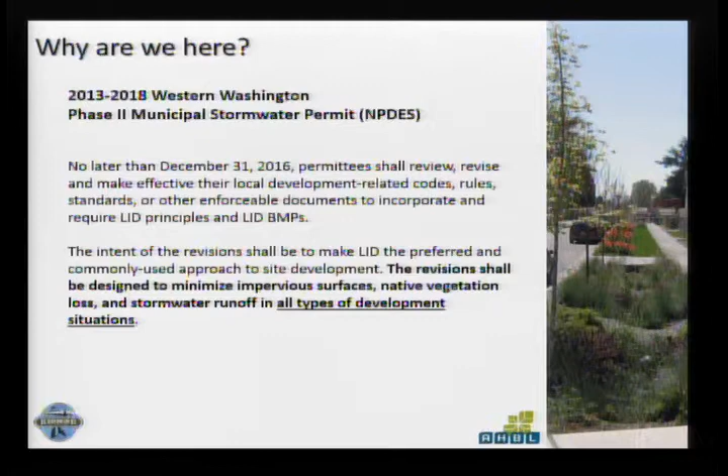Thanks, Richard. Again, my name is Wayne Carlson, and I'm not going to bore you with a lot of details you've already heard before, but I wanted to describe LID within the context of the permit - not necessarily the science per se, which I know you've been introduced to. You have plenty of low-impact development practices and principles right here on City Hall property. But I wanted to let you know what the permit is saying.

The permit says that low-impact development is a stormwater and land use management strategy that seeks to mimic pre-disturbance hydrologic processes of infiltration, filtration, storage, evaporation, through small-scale distributed facilities. The underlining in this definition relates to the fact that it purposefully says it's a stormwater and land use management strategy. That means the design of bioretention facilities, or the design of permeable paving - those are your stormwater facilities, or as Richard indicated, stormwater BMPs.

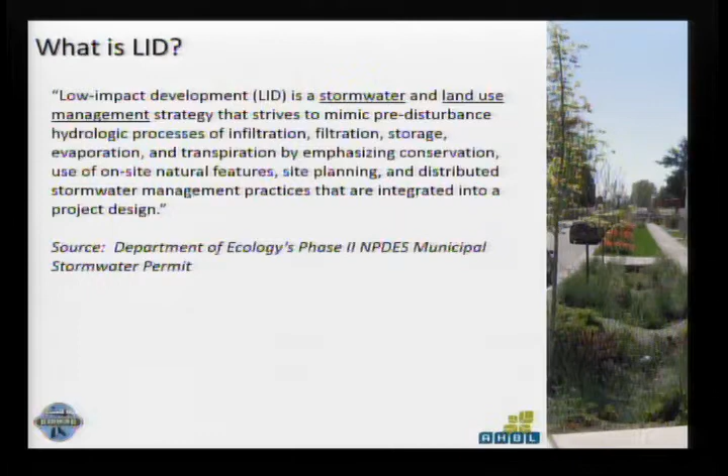So the key LID principles include reducing impervious surface coverage, reducing native or adapted vegetation loss, and reducing stormwater runoff. The key LID BMPs include dispersion or infiltration of stormwater, bioretention, and permeable paving. The permit also addresses some optional BMPs too, that permittees - and that's what you're known as, the City of Kenmore, in the vernacular of the permit, is a permittee - can also address, and those are rainwater harvesting, pin foundations, and vegetative roofs.

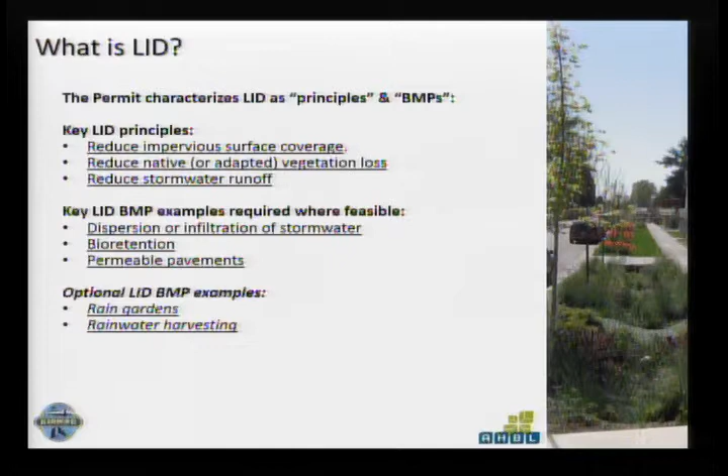So what we're trying to do is mimic a pre-development hydrologic process where, depending on the soils, you have some infiltration, but certainly a lot less surface water runoff, a lot less surface flow.

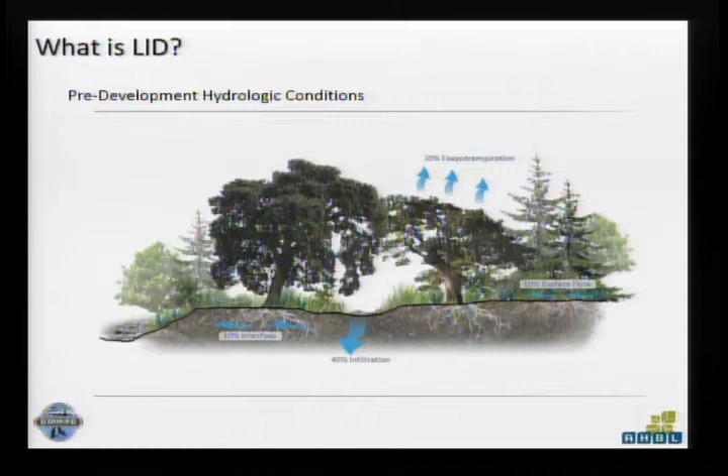So obviously in this developed condition, you still do get some evaporation off, say, a rooftop, but you have a lot more pollution-generating impervious surfaces, and the accompanying contaminants that run off of those surfaces. So obviously stormwater management is much more important in this developed condition.

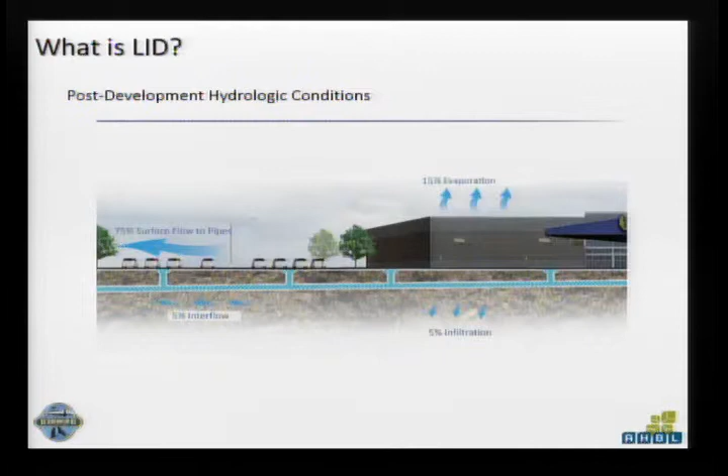So some of the real benefits, and I'll go through these quickly so we can get more to the permit: LID can reduce volumes, thereby minimizing high flows. Bioretention, for instance, is a type of enhanced treatment in the Surface Water Management Manual. It can replenish streams and wetlands, and reduce the size of conventional facilities. So often what you'll see is a combination of both — some LID used to reduce the size of a pond or a vault. It can increase open space, be visually attractive, and result in construction and maintenance cost savings.

And that kind of depends on the site itself, and then it can increase densities if an area that was previously designated for a pond or a vault now can be developed.

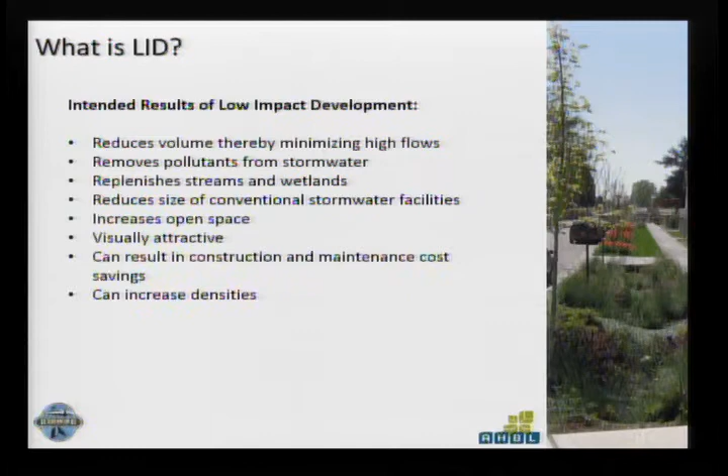One of the things you can also do is use landscaping passive open space that might be required through a subdivision, or even clustering, for surface water management and stormwater management.

The plat to the left is more of a conventional site, and what you don't really see, because it trails off the slide, is that about an acre and a half, almost two acres of property was required for an offsite pond on that left-hand side. So it was actually much more expensive to construct the one on the left than the right. The right manages stormwater mostly through natural features. There is a small pond, but it's significantly reduced in size.

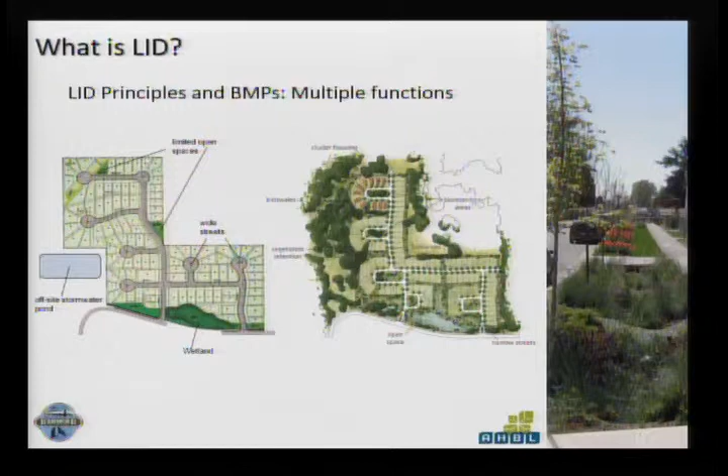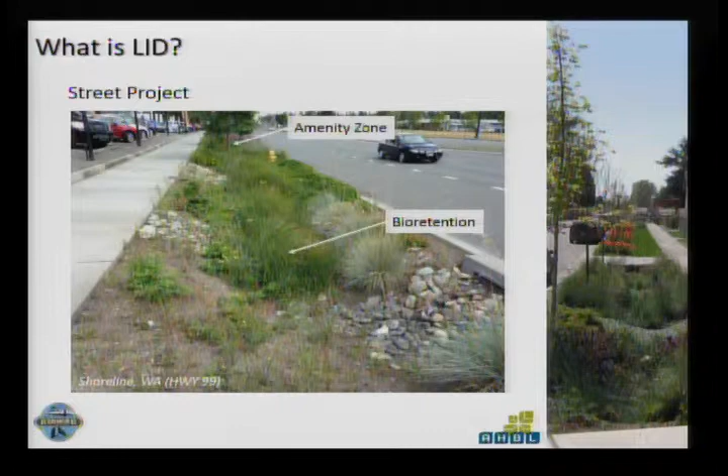Another big question was who's going to maintain these facilities. Facilities, whether traditional or low-impact development, if they're serving non-residential, commercial, or industrial properties, maintenance is the responsibility of the property owner or facility operator. But as these facilities are built as part of a larger surface water plan, they give the city drainage covenants or easements so we can inspect and make sure they continue operating as designed, since these folks get credit for having and maintaining them as part of the overall surface water management plan. Again, facilities in the public right-of-way, tracts, or easements are inspected and maintained by city personnel. The rain garden example on the single-family residence had a drainage covenant provided to the city—that photo was actually snapped by our inspector during one of his inspections.

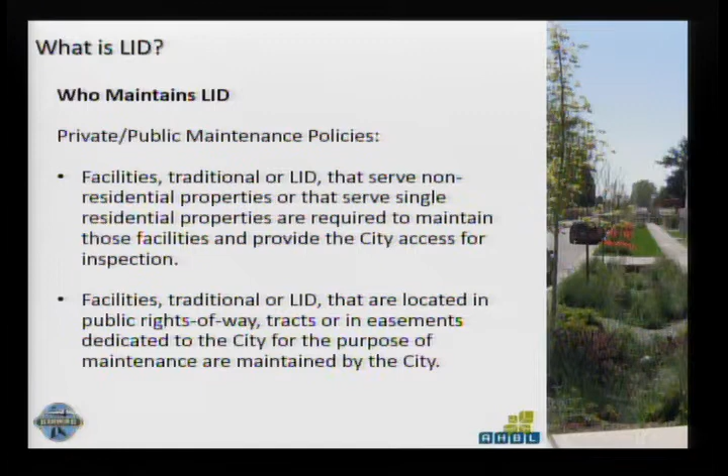Now we want to talk about the integration of LID principles and BMPs into the city's codes and enforceable standards. As Richard indicated earlier, a condition within the NPDES permit, S5C4F1, requires the city do this before December 31st of this year. The high-level elements are that low impact development is required unless infeasible, for all sizes of new and redevelopment projects—really, all sizes of 2,000 square feet of new plus replaced impervious surface, so the threshold is pretty low. The city must review and amend local codes and standards to integrate LID principles, incorporate required LID BMPs, and consider optional BMPs as desired.

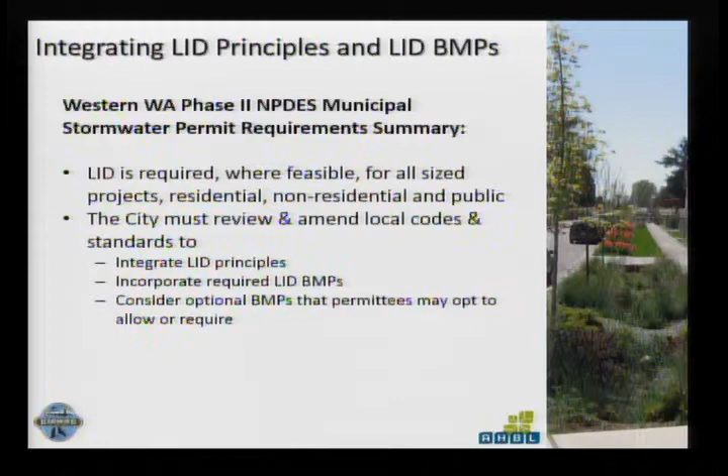So the integration really begins with a gap or opportunity analysis to identify those codes and standards that already meet the intent of the permit and where updates might be necessary. The permit describes this as a gap analysis, but I actually like to refer to it more as an opportunity analysis, because many communities like Kenmore already have codes and standards that are very supportive of the use of these practices.

So where we see opportunities would be to require the principles be integrated earlier on into the design process, achieving the principles of minimizing vegetation loss, minimizing impervious surface, and thereby minimizing stormwater runoff. Some of the methods include conserving vegetation, reducing impervious surface coverage, distributing small-scale techniques across a development site, and using infiltration. And of course, adopting the ecology manual or an equivalent - King County's 2016 surface water design manual has been deemed an equivalent.

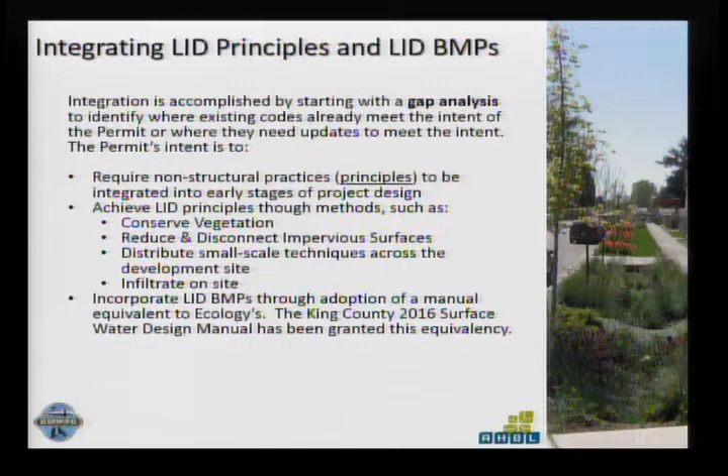So the types of sections and topics that we examined were site analysis, vegetation, canopy conservation, reducing impervious surface coverage, clustering, road widths, parking design, and incorporating bioretention into required landscaping. One of the real goals is not to have these practices as just another regulation or layering on, but to use these landscape-based stormwater management practices where you would already be required to landscape a site anyway. So, for instance, if you're required to landscape a certain percentage of a parking lot, to do that with bioretention instead of, say, a raised parking lot landscape island.

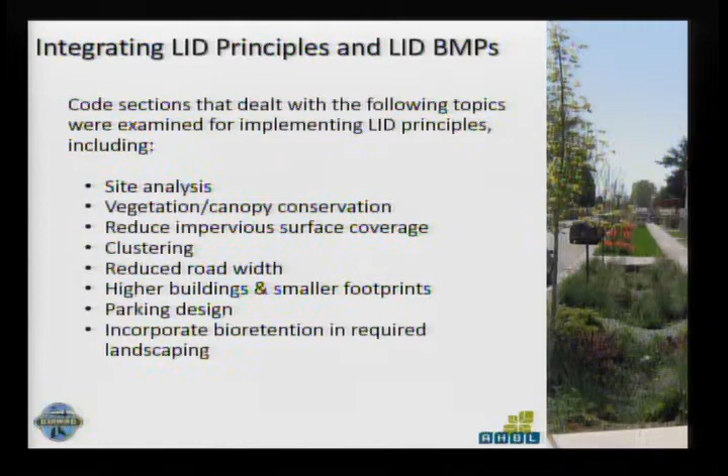So with the permit, some of the things you will see more of are bioretention and permeable paving - that's a fact of the permit, provided it's feasible. The idea is not to shoehorn in or require practices where they're technically infeasible. Ecology has written up about 2 or 3 pages of technical infeasibility criteria for all of the BMPs, so it's not a moving target. Designers will know what's infeasible, whether it's the infiltration rate of the underlying soil, proximity to high groundwater, or the slope of a site - that infeasibility criteria is known.

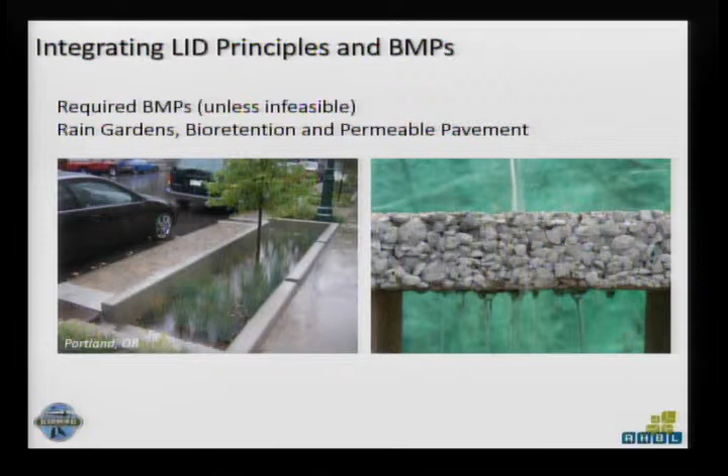You'll see a lot more dispersion and perforated stub-out connections, things like that as well. There are some optional BMPs that some communities are encouraging. I don't know of any of the permittees, either Phase 1 or Phase 2, that are requiring any of these BMPs, but some are incentivizing, for instance, vegetated roofs or rainwater harvesting, but certainly not requiring them, because these tend to be the more expensive of the stormwater management practices.

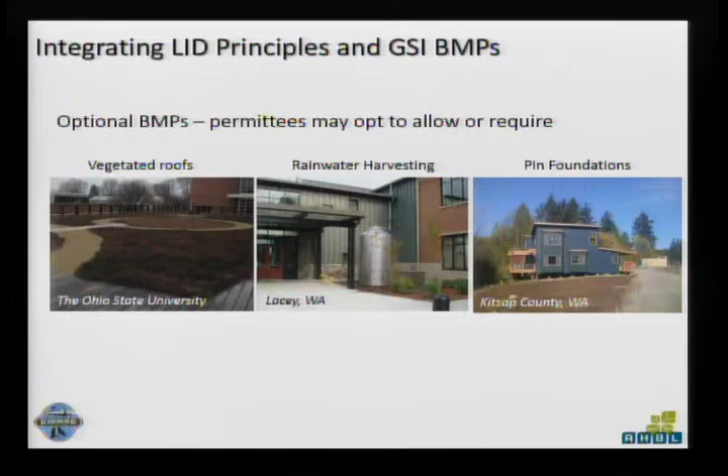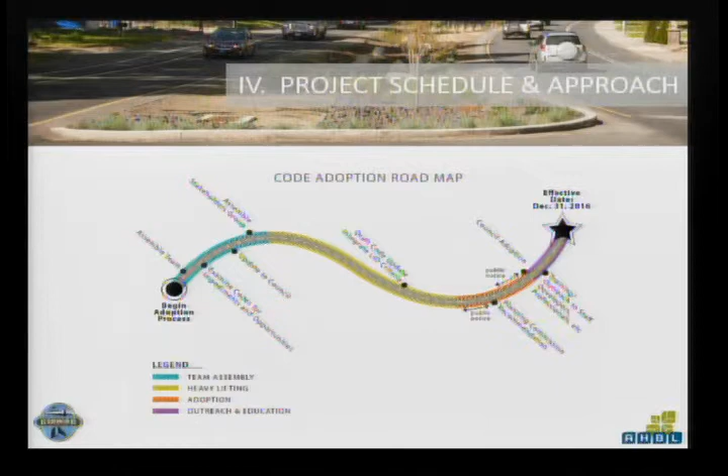The guidebook that we have been using, or the official guidance, comes from the state, and it's stipulated in the permit. It's called Integrating LID into Local Codes and Standards. Actually, myself and another person from our office authored this for the Puget Sound Partnership almost 5 years ago now. It has about 6 steps in the guidebook, and the city of Kenmore has already finished the first 4, including assembling a team, figuring out the topics to address, and providing some draft amendments. Right now we're in the review and adoption phase, and then the implementation phase follows.

So what I wanted to do now is give you - and Alex will take over - a high-level summary of the amendment proposals. We're not going to read these slides word for word, even close, but all this material is in your packet. So what we wanted to do is really just give you the highlights.

Yeah, and as Wayne mentioned, it really is an opportunity analysis. The first step of this process was to go through the municipal code with a fine-tooth comb and identify a lot of places where the city of Kenmore is already in line with this permit, and identify some areas where there could be potential to integrate low-impact development elsewhere where it isn't currently.

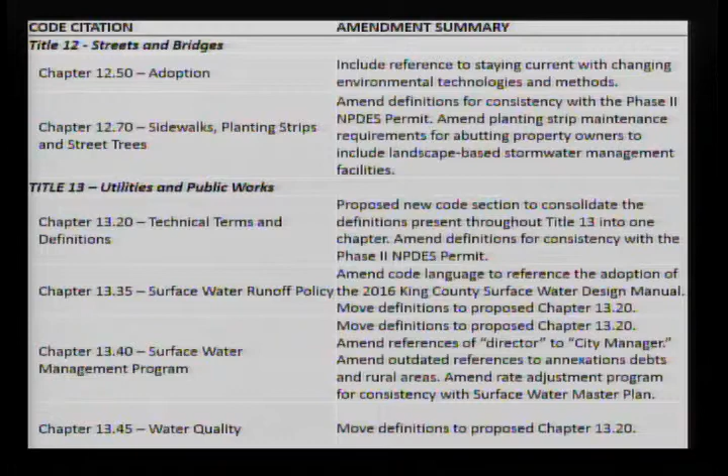Title 15, Buildings and Construction—we really looked at land alteration and, again, really definitions. Definitions is a lot of the heavy lifting in the gap analysis, identifying how to incorporate the permit into the definitions of the code moving forward. How can the city and developers be on the same understanding of integrating these low-impact development techniques?

Title 17, Land Division, really focuses on subdivisions and short subdivisions. That's really where you start to get into the key aspects of the NPDES permit—things like retaining native vegetation, looking for opportunities to encourage native vegetation retention as land gets subdivided.

Title 18, as I mentioned, is really the bulk of the work here. A lot of definition updates, and a lot of recognition for things the city's already doing well, like maximum impervious surface coverage percentages, in line with other cities we're working with right now. The highlight of this section is in the lower density residential areas like the R1, R4, and R6 districts, looking to implement a base impervious surface coverage that can be exceeded up to the current maximum with the implementation of these LID techniques. So really it's all about incorporating LID techniques as appropriate and as necessary.

One major area we identified to incorporate LID techniques is within required landscaping strips—allowing developers or property owners to incorporate LID techniques in required landscaping screenings, provided it still meets the intent of those screenings. So really it's where feasible, as Wayne mentioned. We're not looking to create any hardships; it's about looking at where these low-impact development techniques can be appropriately integrated into city development moving forward.

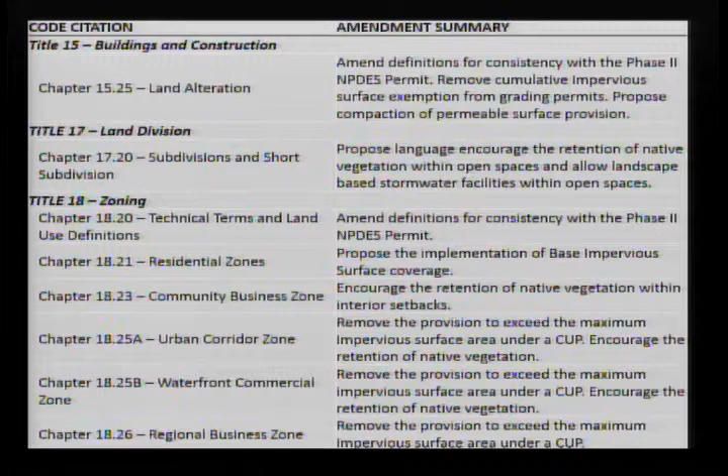Still looking at Title 18 zoning, there's some code cleanup too—things like the golf course zone. There's a code reference where trails don't count as impervious surface, which doesn't fit with the maximum impervious surface coverage total they're allotted. It's two code provisions that conflict with each other. This gap analysis gave us the opportunity to recognize those items and clean up the code moving forward.

So that's about it for the presentation. On the last page, you'll find some great resources Wayne's provided—follow these links to learn more about low-impact development if you'd like.

I also wanted to point out the schedule moving forward. This is our first meeting for the actual integration with council. Next week, we'll follow up with a couple of informal open houses for the public at City Hall—a short presentation, provided materials, and we'll take comments and questions to incorporate into our review as we prepare the second draft. That will be at a next meeting, date not yet scheduled, but most likely sometime in October, after we've reviewed initial public comments and council questions and incorporated those into the second draft. Following that, we'll have a public hearing with that draft, and then see where we're at—scheduling one or two more meetings as needed.

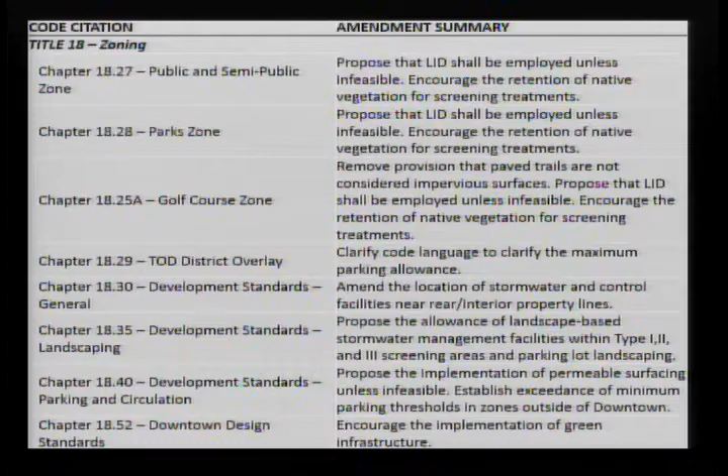But we also recognize that throughout a city, you're going to be treating different areas differently. There are certainly going to be different impervious and hard surface limits in a downtown, because you want that more urban feel, than you would in the residential areas. So it's not as if there's some bright line that a city needs to reduce impervious surfaces or hard surfaces by some certain percentage, citywide. You're supposed to balance this and harmonize it with all the other planning objectives you're already doing as a city.

But also to make a meaningful difference. So it's a tricky one and requires some finesse.

To expand a little on what Wayne was talking about, in your example there are other factors involved. Driveway placement might have sight distance requirements for safety. The fire district can only get their equipment down to a certain size. So another thing we look at is applying these things that are feasible, and also to the maximum extent practicable. There may be cases where shrinking a road is going to impact other human safety concerns, so certain things may trump in certain areas.